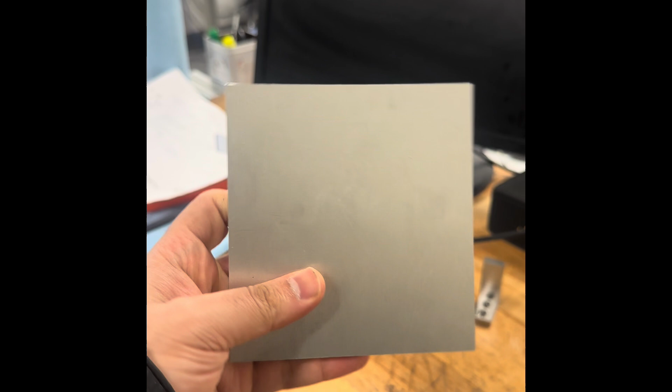Just gonna summarize. Here's the mill, here's the workstation. Goal is robot sits somewhere here, takes the piece of stock. This is what the stock looks like - it could just be this in different sizes or variations. So right, I mean this is a larger piece, but it needs to take the piece of stock.

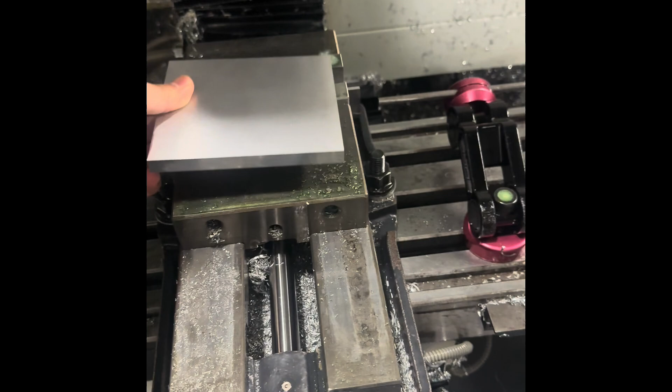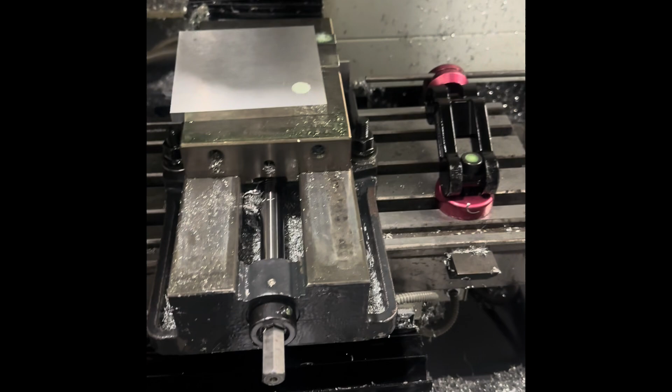Place it in the vise. Obviously needs to open the vise, and then the robot needs to come here once it's placed in the vise and clamp it with the handle or something, or the vise needs to communicate with the robot to clamp itself once the stock has been placed.

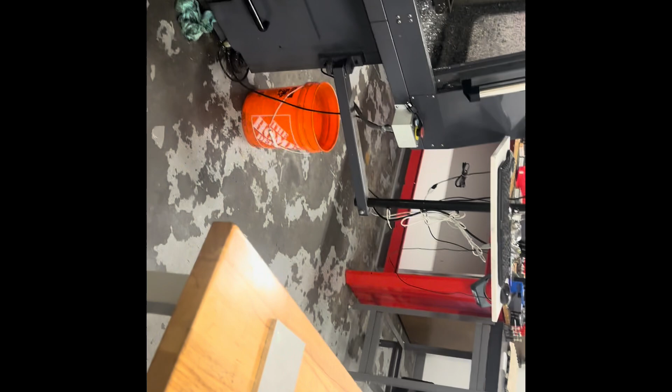So I can already see a couple of problems. If you turn it vertically, you see I can't have the robot perpetually sitting here because my machinist needs to work here, and when we're doing one-off parts, he needs to have all this space clear.

So I'm thinking maybe we put the robot on wheels or something - running on that point, let's say it's on a cart or something. We can have my operator cut stock on the bandsaw, put it on the cart, and when we want to enable the robot, we move the cart here, teach it how to move, teach it to place the stock in the vise, and then hit start.

So something like that is probably what we're gonna do, at least that's what I'm thinking right now. And we'll be working on this about 4 to 8 hours every weekend.

I'll spend about 3 hours - I got some other work I got to do, so I'm gonna spend about 3 hours scoping the requirements on this thing, and I'll put that together in a spreadsheet, and maybe I'll share that. Before I stop working to move on to my next project, I'll go ahead and share what that looks like. So I'm gonna get started on that.

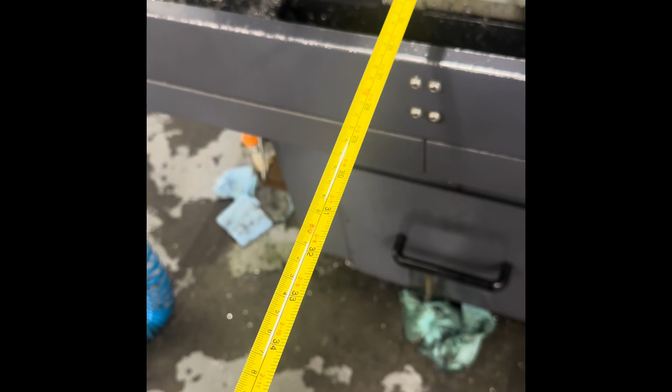All right, so I'm taking some measurements just to see what the initial size of this robot would be.

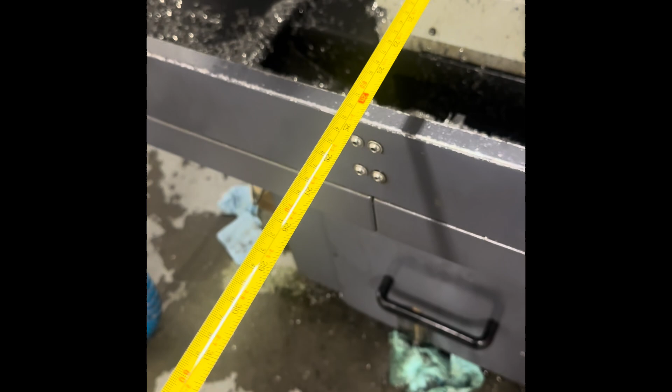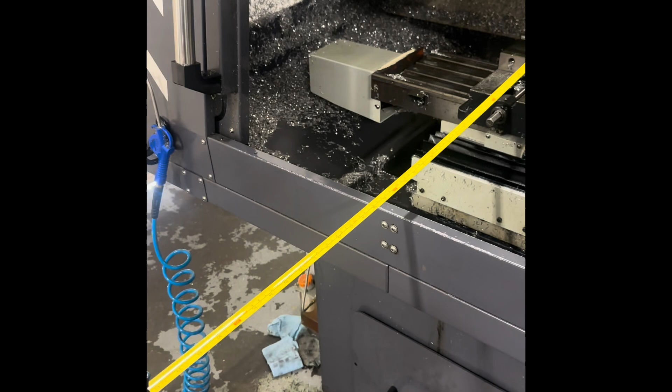So I imagine the robot will sit around this position right here, and from there to the center of the vise is about, let's just call it an even 40 inches. So basically, the cart would sit about 40 inches from center to center of the vise. Plus you need a little bit of range, let's say if the vise is varying somewhere.

Perhaps it's this or that, but let's assume 40 inches, because the other thing we could do is move the machine. We could move the machine table all the way up during the loading position, but I don't know how much that is. So let's just call it an even 40 inches right now.

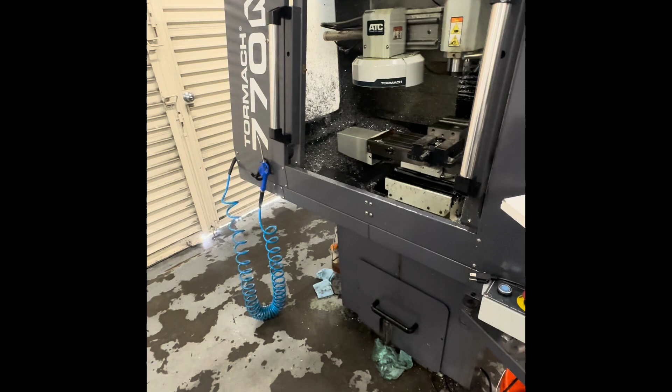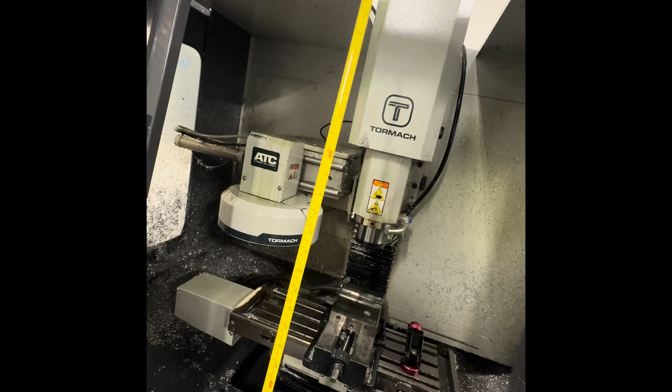Okay, so the height of this thing, let's see how tall it needs to be. I'm not really a pro video expert, but this opening here from the door is 32 inches. I don't know if you can read that, but about 32 inches. Hold on, let me flip my camera.

All right, so measuring the door opening. This is called 32 inches tall, and when the door is completely opened, let's say 24 inches wide. So it's a small door. I'm gonna write that down. Our door opening is 32 inches tall by 24 inches wide.

And then, expanding on that, let's see the bottom of the door distance to the ground. The bottom of the door sits about 38 inches off the ground. So, bottom of the door is 38 inches off the ground.

Now the other thing I just thought of when doing this is the robot — well, if we leave the door open, then when the parts are running, you have coolant that gets ejected from the coolant nozzles and it makes a complete mess. So the robot has to close the door. I guess that's going to be a functionality when you look at it. So we're gonna have to close this door and this door.

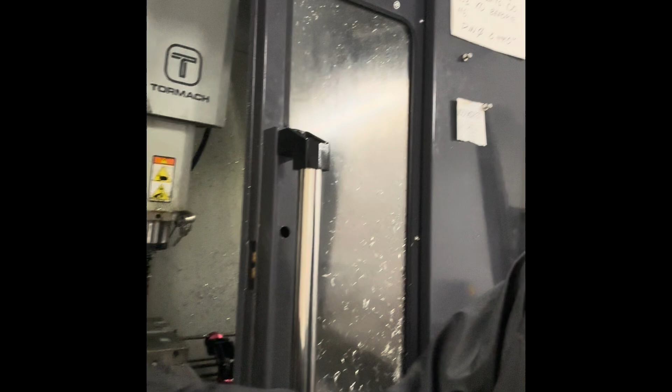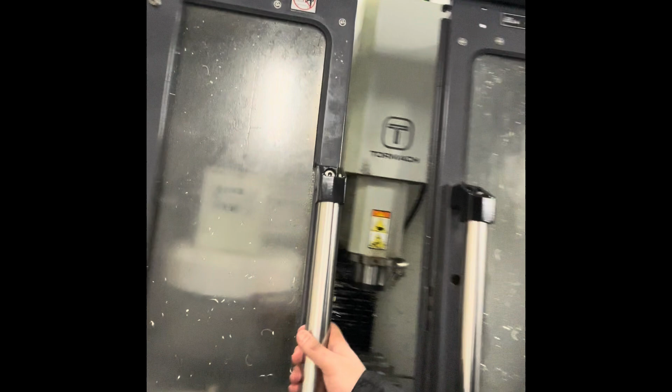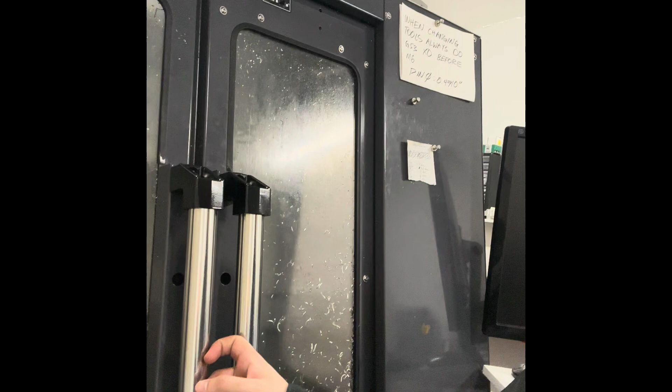So maybe I'll need to load the part in, come here, and close this door first, and then this door, and then keep it shut. I might need to do something on this, but right now the robot should be able to do that — grab this door, grab that door, shut it. That should be pretty easy.

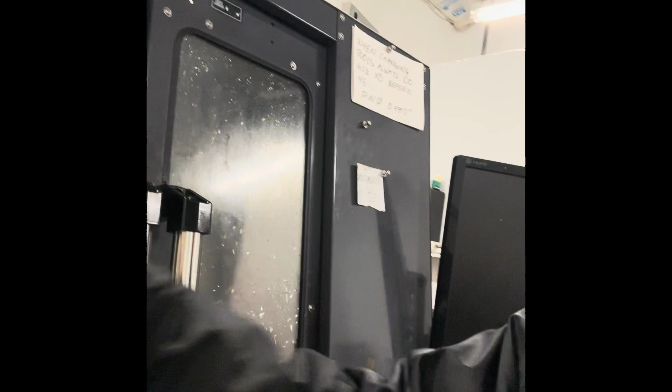But then now I need to think about travel requirements to do that. I don't know, I'll deal with that later. Okay, so essentially our reach — it needs to close the door after placement, and then the other thing is it needs to hit cycle start. So that's gonna be a little tough.

If you look at this thing when it's running, I'll show you that probably a little later, but there's a cycle start button. I don't have a physical button, it's a mouse. So perhaps I can do a shortcut key or something. I have to look into the PathPilot console, but I'm just gonna make a note of that.

So after the robot loads the part, it needs to close the door, then after the door closes, it needs to hit cycle start.

All right, so assuming I can do all of that, I think that's about the flow. Just to recap, basically the robot will be on a cart, so it's mobile, and it'll be wheeled from the bandsaw in front of the machine, and I can have marks on the floor approximately where the robot should be placed. Load from saw to machine, and then once it's done that, it's gonna be tough.

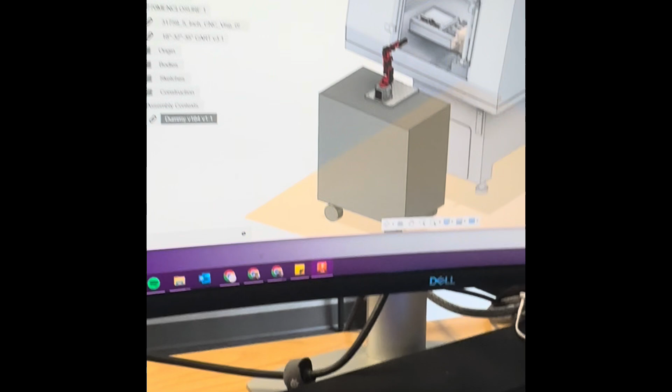Hello everybody. Okay, so what I'm going to do right now is go over some of the initial thoughts I've had while looking through the requirements. Essentially, this is the machine model, thanks to Tormach for providing this for us.

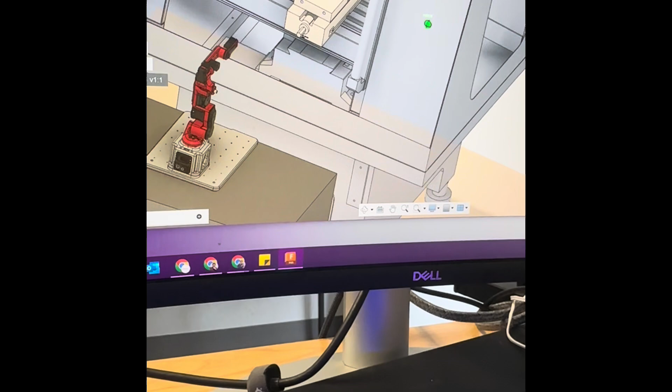I've downloaded that here, and here's just a sample cart that I looked at with McMaster, and I modeled up the dimensions. So what I've done right now is looked at some of the existing systems on the market, and you can see there's a couple I've listed here.

There's this AR4 robotic system by Annin Robotics, which seems pretty interesting—I'm going to do a little more research here and get a better feel for what the system is. Basically what I've listed here are just open source robots that I could find and piggyback off of.

Then there's the Elephant Robotics arm, which is pretty interesting, but these are incredibly small robotic systems. And then there's this Thor robot, which I've looked at but haven't gotten a chance to dig into yet.

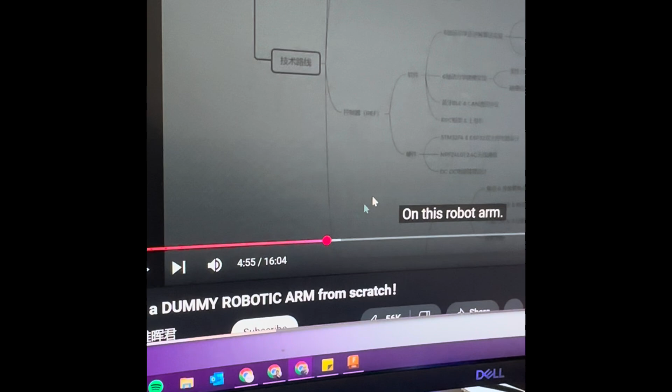One of the arms that was really impressive is called Dummy—he calls it Dummy Robot—from a YouTuber in China named PZ, some really interesting stuff on this project. He has all the files on GitHub, so I downloaded some of them, and I could tell right away here's going to be the problem I see.

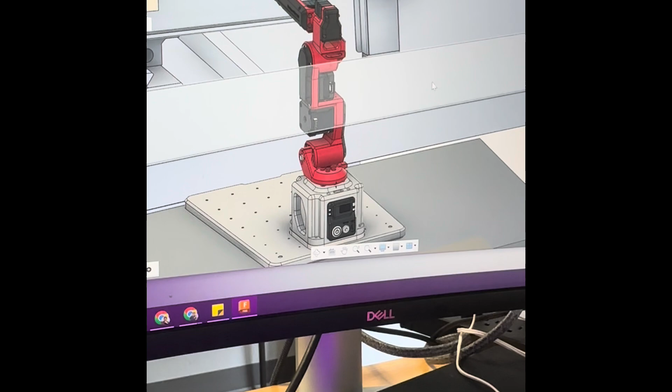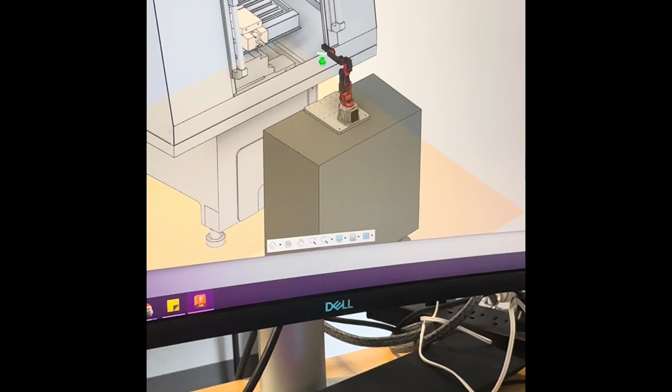This is his arm, and I need to compare it to some of the other ones I found, but a lot of them are around this size. The scope that needs to happen is the arm needs to reach in here, put the part in the vise, and the arm needs to clamp the vise, etc. So the scope of this project is going to be much bigger.

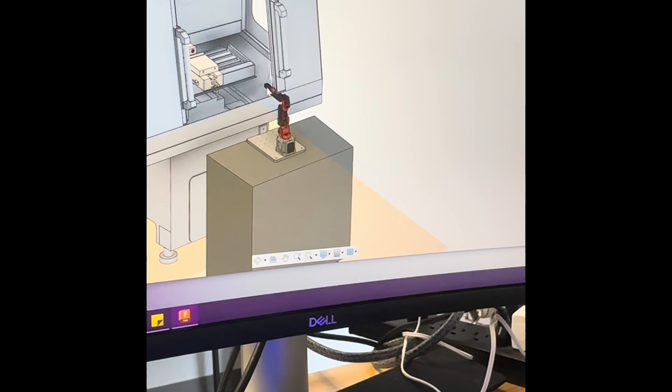I encourage you guys to check out this Dummy Robot by PZ—it's pretty insane, the stuff he's done. It's in Chinese, so you have to pay attention to the subtitles, but you can already tell this is going to be a main problem: a lot of the open source architecture is relatively small compared to what I'll need.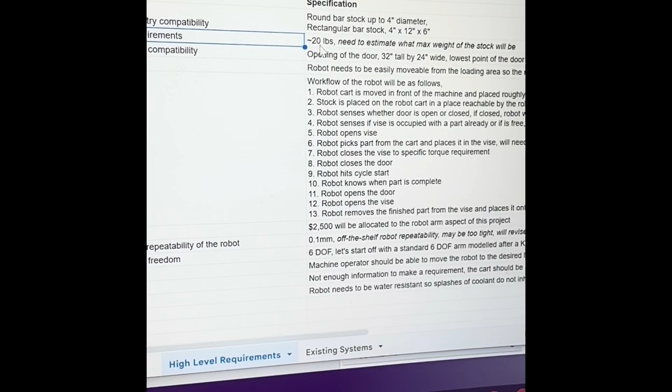You can see that here, and I've also begun compiling the requirements in a Google spreadsheet. Here are the high-level system requirements—starting with what I'm thinking: the payload needs to be at least 20 pounds, and these open source robots are too small, maybe 5 pounds max, which might be too little compared to some of the bigger pieces that I machine. It also needs to be compatible with the door and movable on the cart, and I've gone through the workflow.

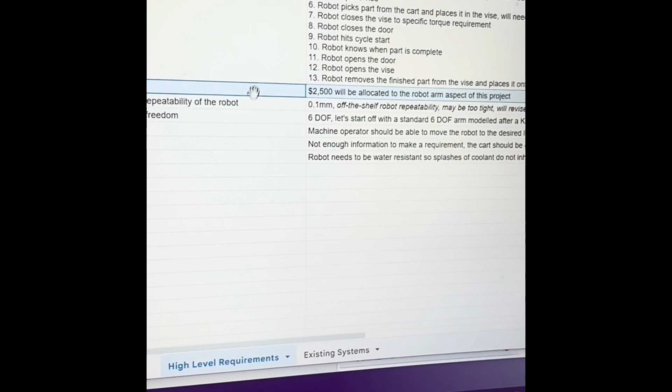One of the things that I think is going to be tough is—okay, we want a $2,500 budget for this, because I'm self-funding this and I'm going to be building it.

So let's see what we can do. Repeatability for placement repeatability should be 0.1. I mean, this is a big system. Smaller systems, it's much easier to get a tighter repeatability, but this is gonna be pretty big.

So I think we're gonna stick with 0.1 millimeter, 6 DOF is what we're gonna go for. And I need to figure out how we're gonna operate this, but basically it needs to be teachable, so the machine operator should be able to use this relatively easily. And then for weight, I need to be able to move this robot cart assembly, and it needs to be watertight because we're gonna be using coolant.

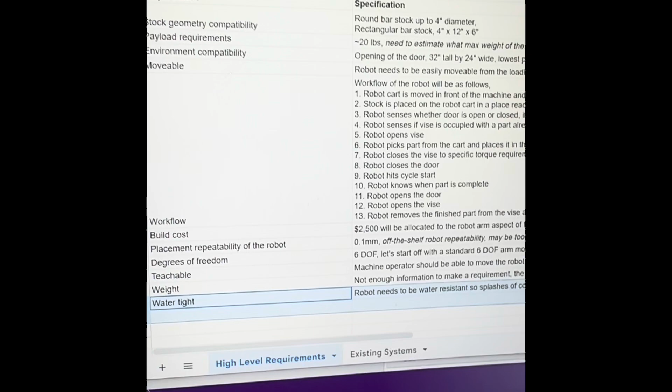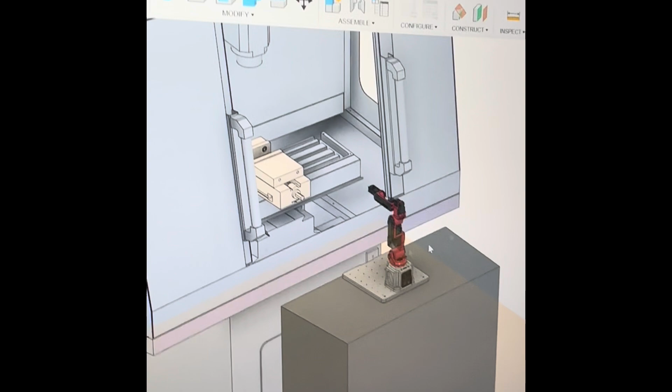So yeah, I'm gonna continue working on this, but I just decided to share you guys a little bit of what it's gonna look like and the scope of this project. I'm gonna work for another hour, eat some lunch, then work an hour more after lunch, then move on to some other stuff. But I'm gonna see if I can put together the basic geometry of the robot so I can get the approximate size requirements, and then we'll go from there.

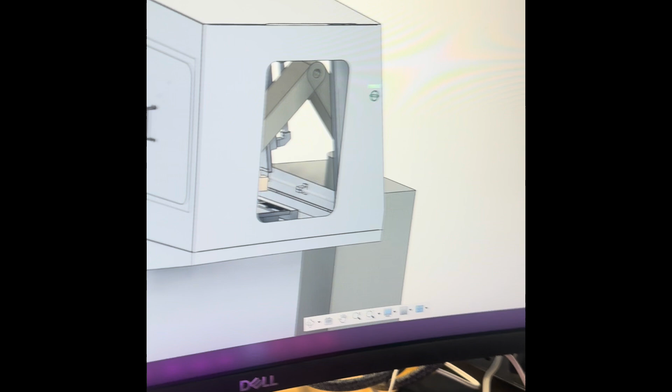All right, stay tuned. So what I'm gonna do is probably call it a day after this, but essentially what I have here is the basic size profile. So here's the cart, here's the machine, and then you see those are the shoulder, elbow, the wrist, and the base.

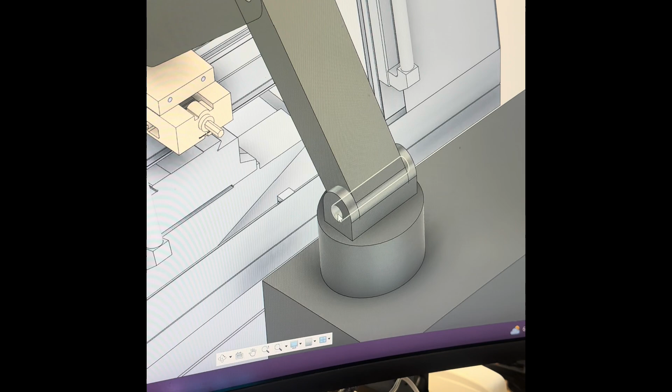So obviously there's going to be a turning in the base, that's the first degree of freedom. There's going to be the rotating from the shoulder, that's 2, the elbow, that's 3, then there's going to be this wrist rotation, that's 4, and then there's another wrist rotation here, that's 5.

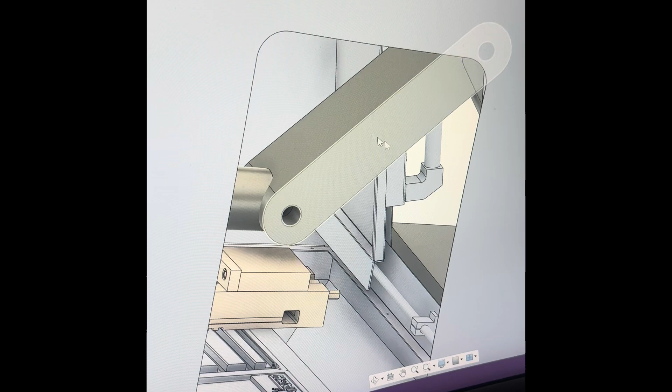And to make it 6, I need to look at the architectures again, but I believe there's an intermediate roll here. There's a roll here, then there's the pitch here, and there's another roll here. So anyway, I'm still mocking it up, but I think this is going to be the scale of things, and to put that into perspective...

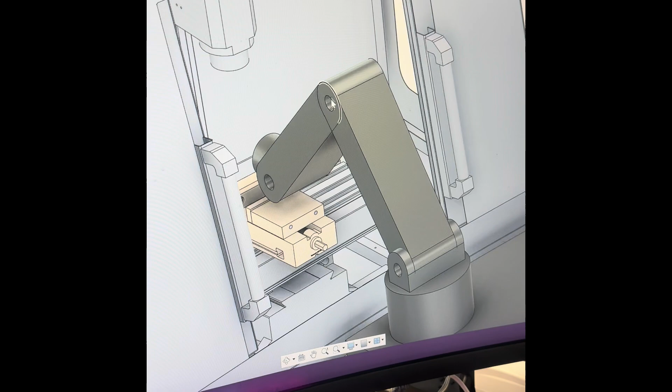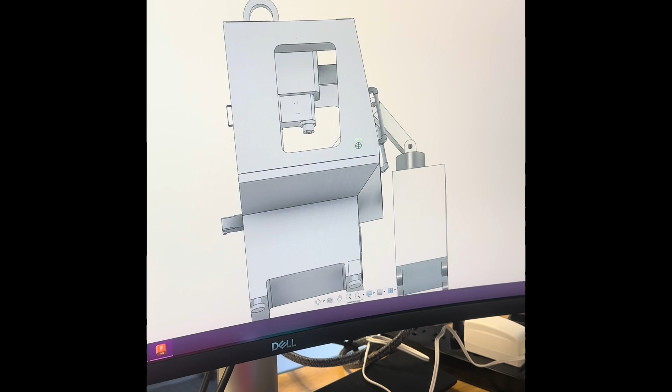Or I'm planning to get a new machine end of Q1 next year, so if that works out, maybe I can use that for some of these bigger parts, but let's see.